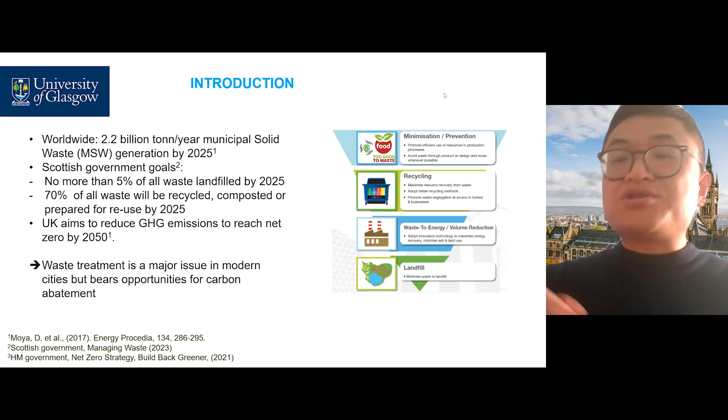So waste management is a major issue in modern cities and across the world, but at the same time it bears opportunities for carbon abatement. In the following slides, I'm going to show how it's possible and how we're trying to understand its carbon abatement potential.

The first case study we did is to understand different waste management schemes deployed in Glasgow. In Glasgow, we have about 30 million bin collections every year, and about 350 kilograms of household waste generated per annum per capita.

Our existing practice in Glasgow is that we have a very big recycling and renewable energy center. It's a centralized large system based on two technologies: anaerobic digestion and gasification. This helps to treat about 222,000 tons of waste every year. That is our existing technology.

These systems help handle, for example, food waste, garden waste, and other organic waste, as well as paper, cardboards, etc.

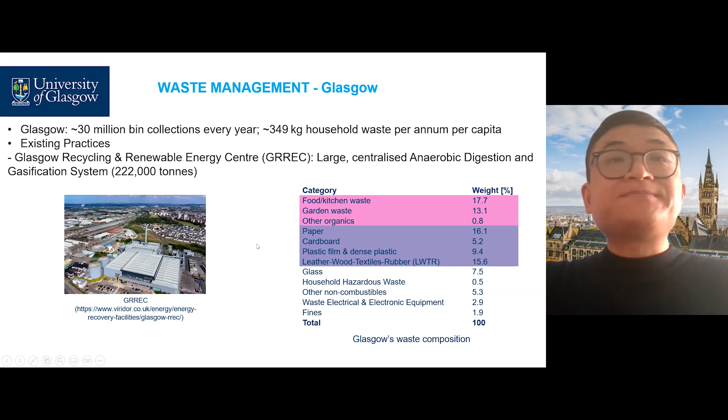So what are the environmental footprints of waste treatments at a smaller scale and in a more decentralized mode? This is the first question we are going to answer.

We again consider two relevant technologies: anaerobic digestion, which is devoted to treating organic waste, and gasification technology. For the analysis, we consider the anaerobic digestion technology as a two-stage mesophilic anaerobic digestion.

This is carried out in a continuously stirred tank reactor, which is also one of the most commonly deployed configurations for anaerobic digestion in the UK. We consider a digestate production rate of 500 kilograms per ton of waste treated, and the biogas yield is 350 cubic meters per ton of volatile solids, with a methane content of 60%.

For gasification technology, we consider a common technology deployed in the UK, which is a moving grate reactor. This is suitable for feedstocks with high moisture content, such as the organic fraction of municipal solid waste, and is also suitable for handling non-uniform morphology of municipal solid waste.

We consider air to be the gasifying agent. Solid residue is 15% for soil amendment. This is how we consider using the solid residue generated by the technology.

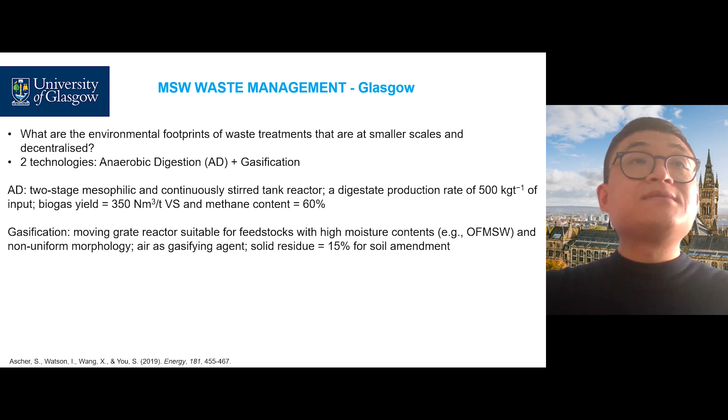So we can see the three scenarios, named 6A&G, which corresponds to 6 townships using both AD and gasification; 6G, corresponding to Glasgow divided into 6 townships, each with a gasification system deployed; and 3A&G, which corresponds to 3 townships using both anaerobic digestion and gasification in each township.

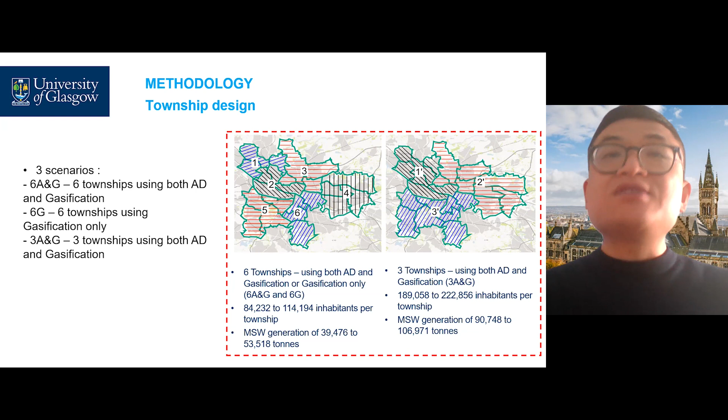Now I'm going to explain a little bit more about the life cycle assessment we carried out. First I'll cover some major points, and more detailed information can be found in the original publication. The functional unit we consider is treatment of 1 ton of municipal solid waste, and the division of different types of waste in that 1 ton is based on waste statistics for Glasgow.

In the system boundary, we consider electricity and heat generated to substitute electricity and heat generated from natural gas. Because we consider different configurations—3A&G, 6A&G—they correspond to different amounts of waste generation and different capacities required for the systems. So for larger plants, larger systems, we increased the process efficiency from 34 to 40% to account for the influence of system capacity on process efficiency.

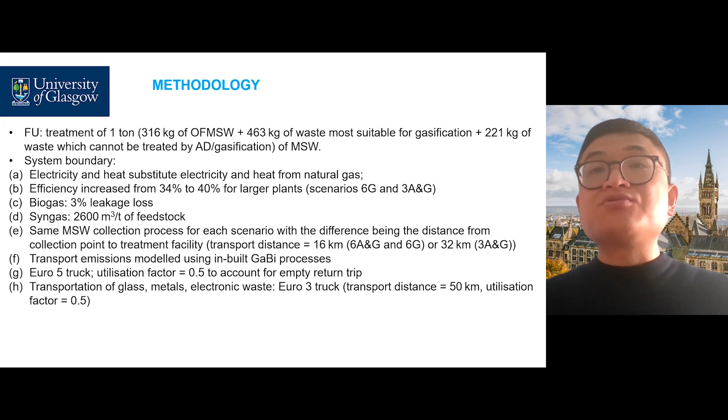This figure shows the system boundary we defined for this case, and the values in brackets indicate the gasification pathway. In the life cycle assessment, we consider three impact categories: global warming potential, acidification potential, and eutrophication potential.

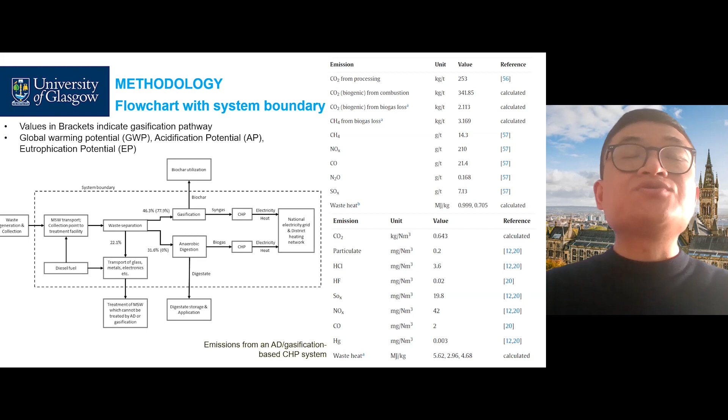Now let's look at the energy generation of the three different types of development. For the 6A&G development, the energy generated could satisfy the electricity demand of about 10,000 households, which is about 20% of local households in the communities served by the 6A&G scenario. The corresponding numbers for 6G and 3A&G are about 9,900 and 23,000 households, which are about 19% and 23% respectively. So this is for electricity generation.

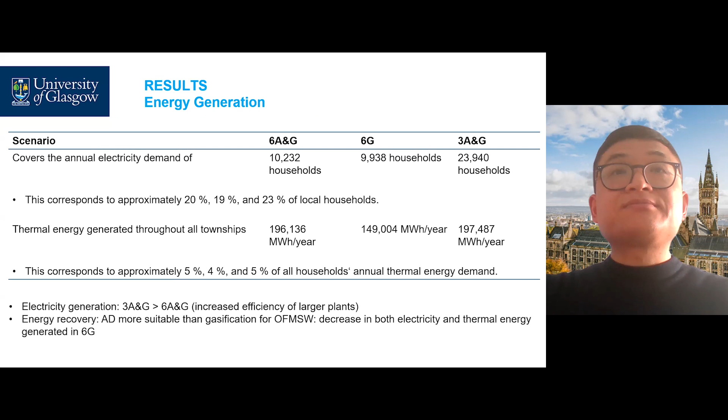For heat generation, we found that for the three scenarios considered, they could satisfy up to 5% of the energy demand of the households. Now let's look at the life cycle assessment results.

We found that for the three scenarios considered, they could generally avoid about 350 kilograms of carbon dioxide for each ton of waste treated. Also, the electricity displacement impact on the three impact categories analyzed is generally greater than the heat displacement. Transportation has a minor impact on global warming potential, but its impact on acidification and eutrophication potential is significantly higher.

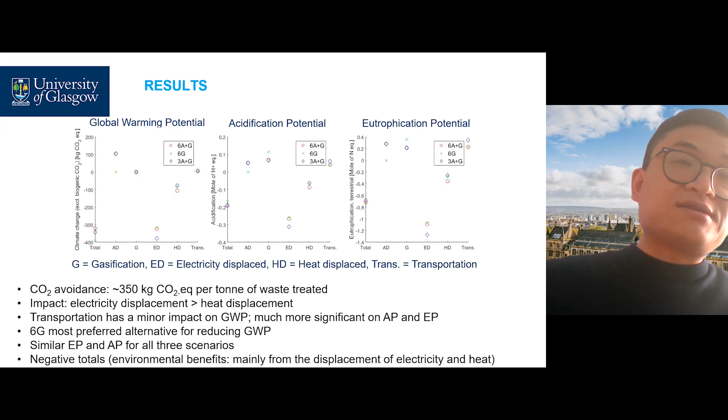The 6G scenario is considered to be the preferred alternative for reducing global warming potential, and these three scenarios achieve similar eutrophication potential and acidification potential.

Following that, we did a very simple sensitivity analysis, evaluating a few major parameters. The first one is the heat utilization rate. In the baseline scenario, we consider that all the heat generated could be utilized by the communities. But in reality, the energy generated might not be fully consumed by nearby communities, so we consider alternative cases with heat utilization rates of 50% and 0%, and explore how that impacts global warming potential.

We also changed the biogas leakage to 10%, considering a worse-case scenario for the anaerobic digestion system's biogas leakage. We found that a biogas leakage of 10% increased global warming potential from about 562 kilogram to 614 kilogram carbon dioxide equivalent, while the acidification and eutrophication potentials were not affected by this leakage.

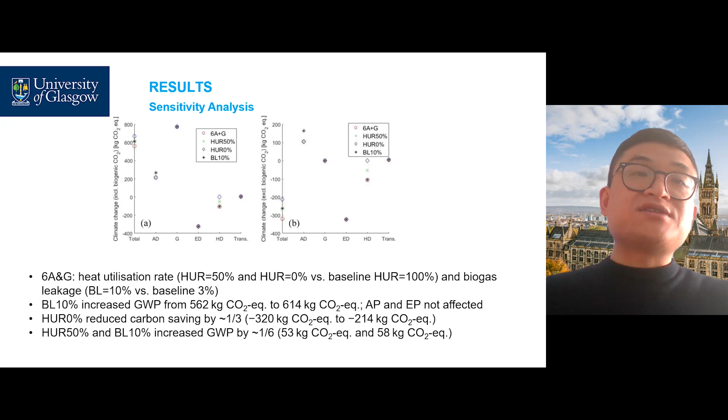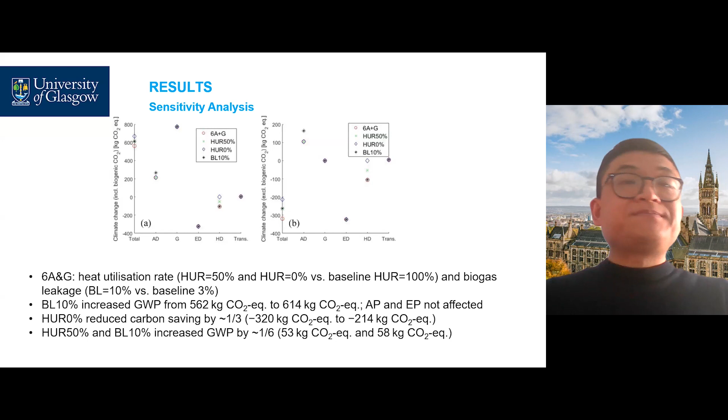For the heat utilization rate, when it's reduced to 0%, it could reduce the carbon saving of this kind of development by one third. So that is the first case for waste management in Glasgow.

The second case is more specifically on food waste management in Glasgow. In this case study, we explore the possibility of deploying anaerobic digestion systems in even smaller communities, and thus smaller systems, to see how feasible that is from an environmental perspective.

Food waste has always been considered a high priority waste stream, with significant social, economic, and environmental consequences. Prevention is key, but unfortunately not all food waste is avoidable. So here we divide Glasgow into 23 zones or townships, based on their 23 electoral districts, to explore the environmental footprint of small-scale system development in these areas.

We consider the food waste to be collected every fortnight by refuse collection trucks, with the biogas combusted in combined heat and power generation to produce heat and electricity, similar to what we explored in the first case. Electricity is fed into the grid, heat is used by local communities, and digestate is supplied to local farms to displace fertilizer.

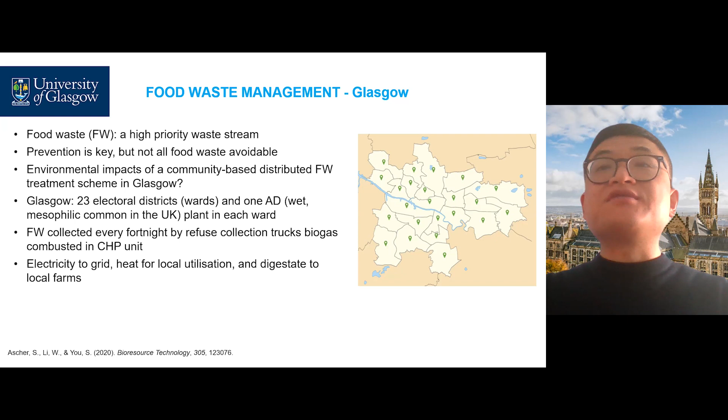For food waste production, it's about 17.7% of the roughly 480 kilogram of municipal solid waste generated per year in Glasgow. We multiply that data by the population of each individual ward to estimate food waste generation, which is then used to define the scale of the systems for energy production estimation.

One different thing from the first case is that we try to use a more sophisticated model to analyze the waste collection or transportation process. We reviewed existing models: the first is the Organic Waste Research model, developed by Swedish researchers. The second is the Waste Recycling and Cost model, requiring data on average road speed, set-out rate of bins, and truck capacity, developed by Australian researchers.

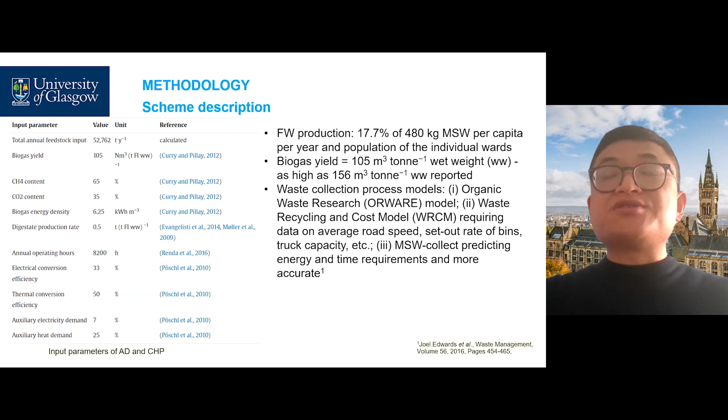Now I will talk a bit more about this collection transportation model. It basically divides the waste collection transportation into three stages. The first stage is the urban haul and return between the center of any collection area and the point where waste is unloaded.

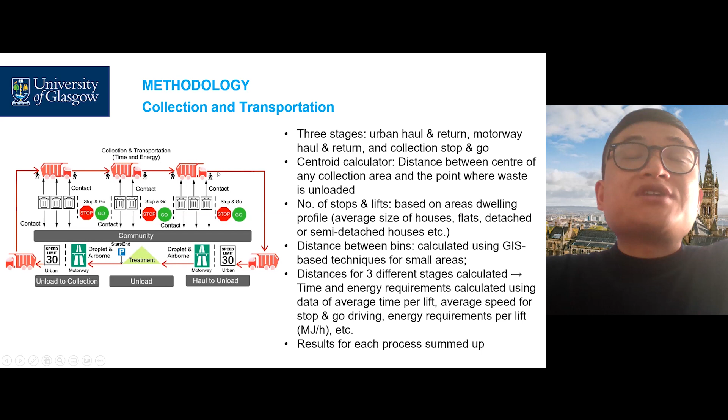By analyzing these three different stages and getting the time and energy requirement for each, we sum the time and energy requirement for each stage to estimate the overall time required for collection and transporting the waste, as well as the diesel required for collection and transporting the waste.

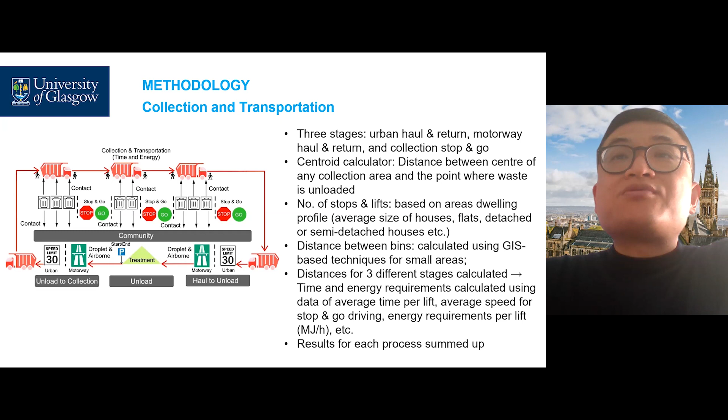Using this model, we estimate for our case that the diesel requirement is 2.95 liters per ton of waste collected, and the truck time required is about 0.83 hours per ton of waste treated. This leads us to determine the number of trucks required is 25.

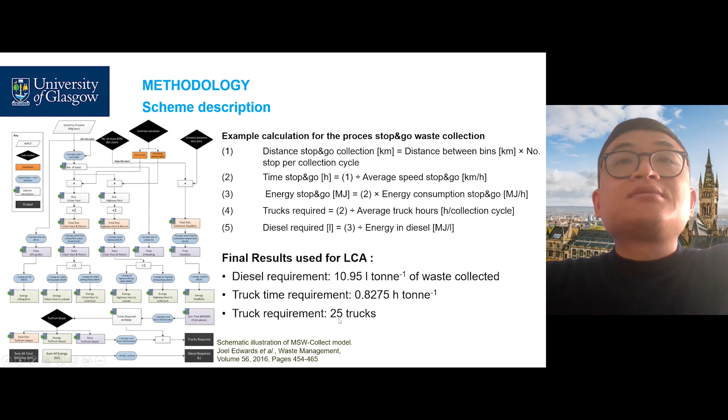Now I will talk a little bit more about the life cycle assessment carried out. It's basically about evaluating a community-based distributed food waste treatment scheme in Glasgow regarding 3 impact categories: global warming potential, terrestrial acidification potential, and particulate matter formation. The functional unit is treatment of 1 ton of food waste.

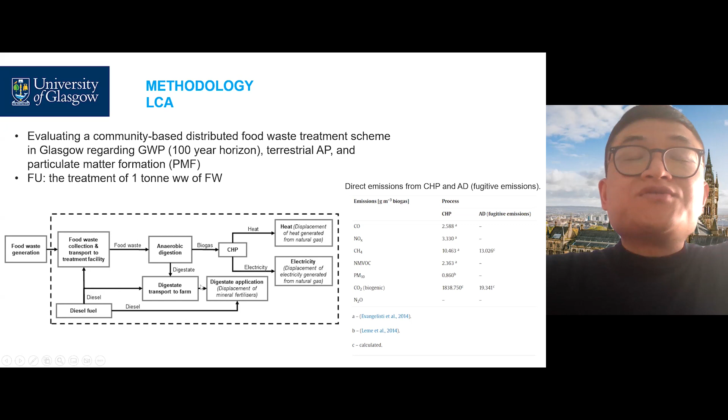The figure here shows the system boundary. It includes food waste collection transportation, anaerobic digestion to generate biogas, and also biogas utilization and combustion in combined heat and power generation to generate heat and electricity, with the heat and electricity used to displace heat and electricity generated from natural gas. For the digestate from anaerobic digestion, we consider it being transported to a nearby farm and used to displace chemical fertilizer.

The biogas leakage, similar to the previous case, for the baseline scenario is 3%. The emissions due to waste collection are estimated using 2 built-in GaBi processes. The first is diesel mix at refinery, which we use to estimate emissions related to diesel production. The second is the dump truck payload built-in process that helps us estimate the emissions related to combustion of diesel in the truck.

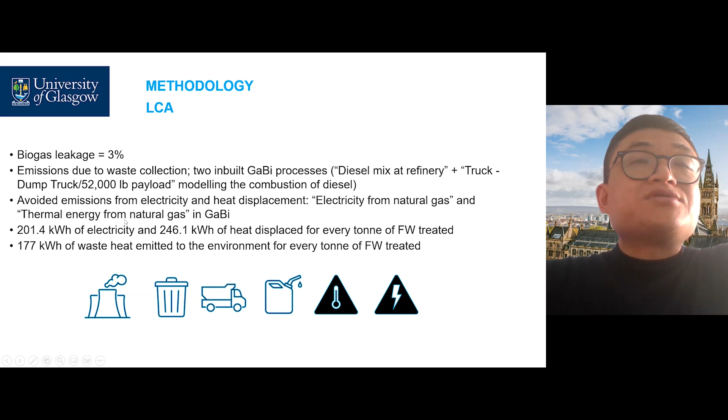For the avoided emissions from electricity and heat displacement, we consider electricity from natural gas, this built-in process in GaBi, and also the thermal energy from natural gas.

Here we particularly analyze the avoided emissions related to digestate application. We consider the digestate being transported and spread on a typical farm in Glasgow, with a transport distance of 20 kilometers, using a 16-ton truck. For spreading digestate on farm, we consider a tractor used, and for on-farm transportation, the average distance is 2 kilometers.

So we use that transportation collection model to estimate the collection transportation of the waste and the associated emissions. To further account for this, we add the emissions from transportation and spreading into the system to account for emissions related to transportation and spreading of digestate.

For the avoided emissions by digestate as a fertilizer, there are 3 factors we've considered. The first factor is that in order to estimate the avoided emissions by digestate, we first estimate the carbon, nitrogen, phosphorus, potassium in digestate based on British food waste composition.

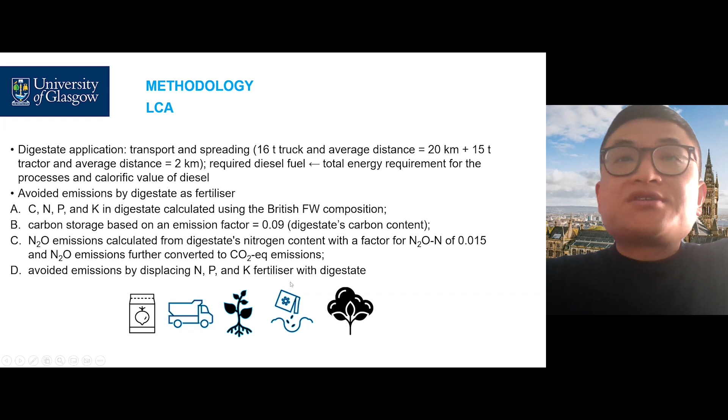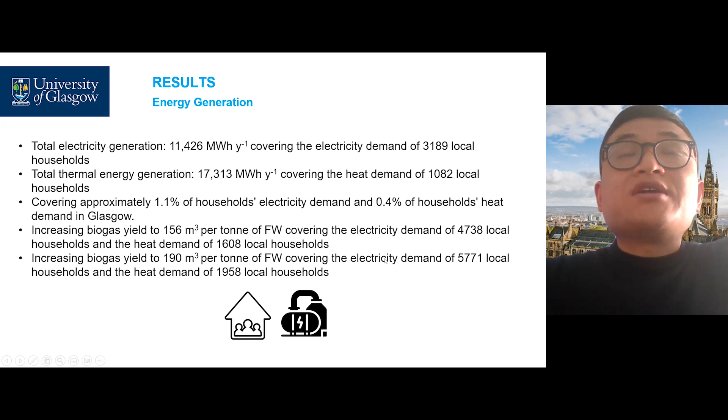For the results, first let's look at energy generation. For this smaller scale anaerobic digestion system for communities, each community could cover, for electricity, about 3,200 local households. For heat, it's about 1,080 local households. This is based on a biogas yield of 105 cubic meters per ton of waste treated. Of course, when the biogas yield is even higher, as reported in the literature, more households will be able to be covered by this kind of development.

For the life cycle assessment results, we find for global warming potential, excluding biogenic carbon, this kind of small scale development could save about 92 kilograms of carbon dioxide equivalent. Similar to the first case study, we find that displacing electricity has a higher impact on global warming potential than displacing heat, which is further higher than displacing digestate. For the major greenhouse gas emitters in this case study, the biogas leakage impact is greater than waste collection transportation, which is further greater than combined heat and power generation combustion.

If we consider biogenic carbon dioxide, it could substantially change the global warming potential. For example, the combined heat and power generation emissions will increase from 31 to about 224 kilograms carbon dioxide, and the digestate related emissions will increase from about 58 kilograms carbon dioxide equivalent to 225 kilograms carbon dioxide equivalent.

For acidification and particulate matter formation, they are mainly dominated by the combined heat and power generation. Combined heat and power generation contributes significantly to all three impact categories in terms of carbon saving. This suggests that post-combustion carbon capture and storage is important for further reducing the global warming potential of this kind of development.

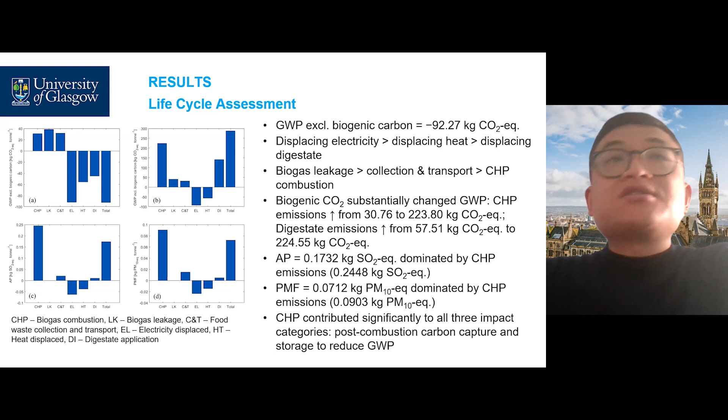So this is the first two case studies. For the third case study, we further expand the consideration of food waste and incorporate the management of cow slurry, because cow slurry is receiving attention by industry. For example, two years ago, news reported that cow slurry is kind of harmful to cows in the farms itself, and at the same time, companies and industries are trying to figure out how to better utilize the cow slurries or manures generated in the farms. The companies try to convert it into fuel used for transportation, and recently they considered generating biomethane to displace natural gas utilization in the grid.

So what we're going to consider is not only handling cow slurry, but handling both food waste and cow slurry. We're going to convert these two organic wastes into biomethane to displace natural gas use, using the anaerobic co-digestion technology, and the digestate is considered to be a biofertilizer still. The objective of this case study is to understand the environmental footprint of that kind of development in Glasgow.

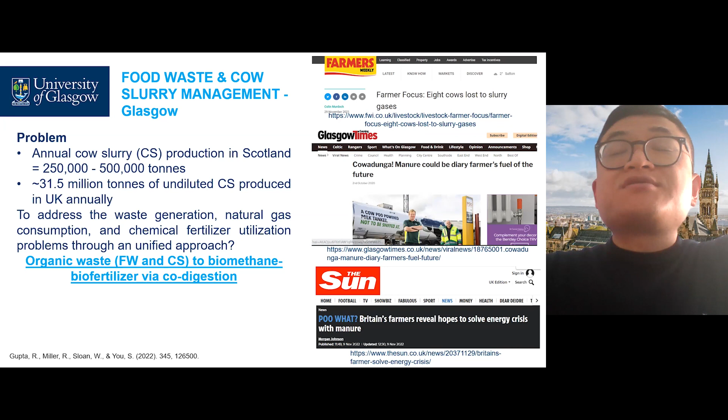In order to generate the biomethane, we need to upgrade biogas, so we need to compare different technologies available. We consider 4 technologies. The first is pressurized water scrubbing, which is based on the solubility difference of different gases to upgrade it. The second is chemical scrubbing, which uses solvents for separating the gases. The third is membrane separation, and the fourth is pressure swing adsorption.

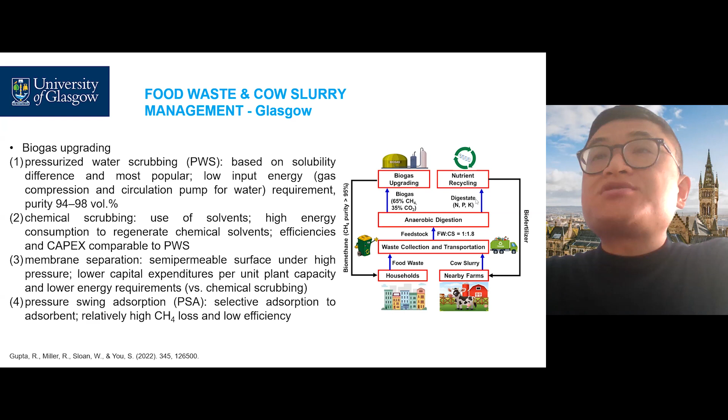This figure illustrates the overall idea of this development. We have the food waste from local households and cow slurry from nearby farms, and we generate biogas, which gets upgraded to generate biomethane, and the digestate being supplied back to the farms as fertilizer.

For the anaerobic digestion technology, we consider a wet mesophilic technology, and the mixture ratio between food waste and cow slurry is 1 to 1.8, and the methane content in the biogas is 65%, as considered before. The food waste considered is coming from 23 wards, while the cow slurry is from the farms of South Lanarkshire, which is a major council in the south of Glasgow.

Again, we still used the MSW Connect model to estimate the time and energy required for this kind of development.

For more details of the life cycle assessment: first of all, the objective or goal of this study is to compare the global warming potential of biomethane production based on food waste and cow slurry co-digestion. We specifically compare different biogas upgrading technologies. The functional unit is the treatment of 1 ton of organic waste, consisting of 360 kilogram food waste and 640 kilogram cow slurry. The scope of the study, the system boundary we consider, includes the processes from the point of waste collection to the injection of biomethane into the grid.

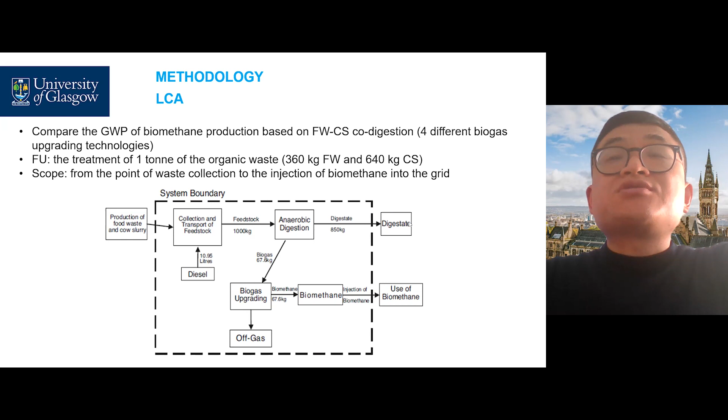Now I'm going to explain a bit more about the major points of life cycle assessment, particularly the life cycle inventory analysis. We consider the avoided emissions of this new development as compared to existing waste treatment, which includes avoiding this kind of waste being treated by landfill and incineration, as well as avoiding the emission related to slurry storage in the farms.

For the collection transportation, we used a similar inbuilt process model in GaBi to estimate the production and combustion of diesel in the processes. For the AD plant operation, we consider it requires 0.13 kilowatt-hour per ton of waste treated, and this is combined with the inbuilt process EU 28 electricity grid mix to estimate the emissions related to AD plant operation.

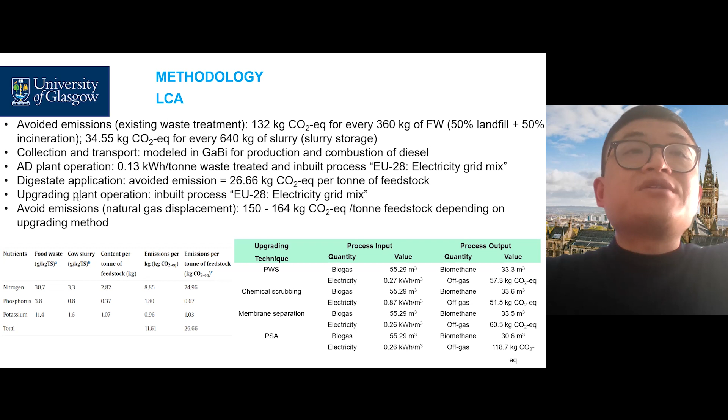For the digestate application, we consider the avoided emission to be 26.66 kilogram carbon dioxide per ton of feedstock treated. For the upgrading plant operation, we consider the energy consumption required by different technologies, as shown in this table, and then combine this electricity consumption with the inbuilt process in GaBi, which is EU 28 electricity grid mix, to estimate the emissions related to upgrading plant operation.

So for the results, let's first look at the efficiency and energy production. We found that chemical scrubbing generates the most energy, and thus could be used to power most households in this kind of development. The membrane separation technology has the highest efficiency, which is 83%, and could be used to power about 2,252 households, while the PSA technology has the lowest efficiency, at about 60%.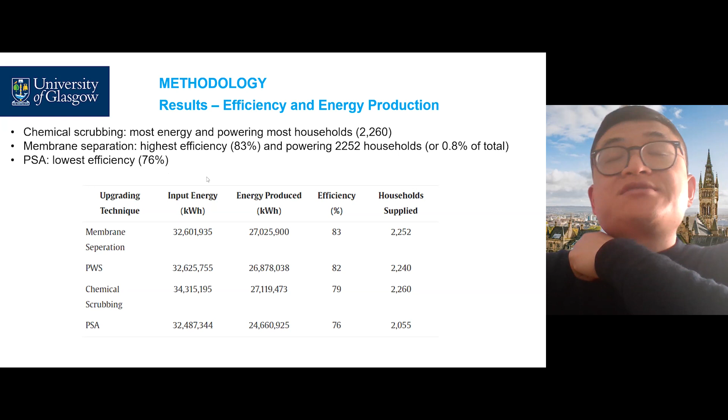For the life cycle assessment result, we found the anaerobic digestion development could reduce global warming potential by up to 264 kilogram carbon dioxide equivalent per tonne of waste treated. And for the waste collection transportation, it accounts for about 7 kilogram carbon dioxide equivalent per tonne of waste treated.

And for the plant operation, it contributed about 6 to 15 kilogram carbon dioxide equivalent per tonne of waste treated. This is about upgrade plant operation. So this number varies depending on the technologies utilized.

The biogas leakage is still a very significant contribution to the global warming potential, which accounts for 22 kilogram carbon dioxide equivalent per tonne of waste treated. The digestate application could help save about 27 kilogram carbon dioxide equivalent per tonne of waste treated.

The largest carbon saving comes from the natural gas displacement, which is the major benefit of this kind of biomethane development. Compared to the different biogas upgrading technologies, we found PSA is less favorable due to its high off-gas emissions and thus relatively higher carbon footprint.

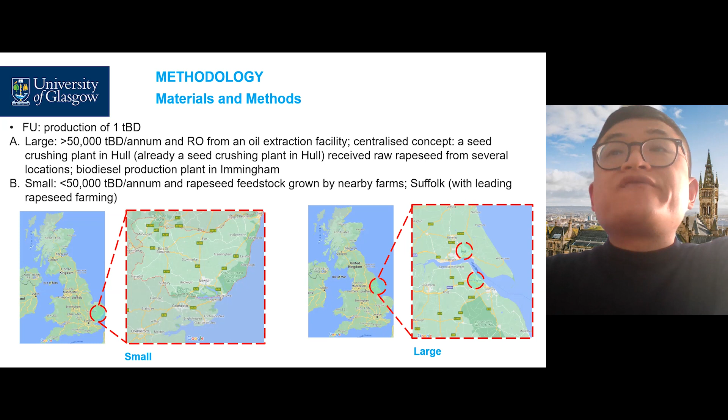For small-scale development, we consider a scale smaller than 50,000 tons biodiesel per annum, with the rapeseed feedstock grown by nearby farms. This plant is located in Suffolk, which is considered to have a leading rapeseed farming system.

For the system boundary, we consider, as just mentioned, the 4 major stages involved for biodiesel development. I will then explain them one by one.

The first one is rapeseed agriculture. We consider cultivating rapeseed by following the guidelines by New Holland Agriculture, which is adapted to the UK context based on the Farm Management Handbook.

For the large-scale development, rapeseed agricultural cultivation starts with subsoiling, which happens every 4 years, and then the soil is plowed with minimum tillage. Following that, seed is sowed and rolled onto the ground, then fertilized twice, with pesticides applied 6 times for each farming cycle. Then the rapeseed is harvested using a combined harvester.

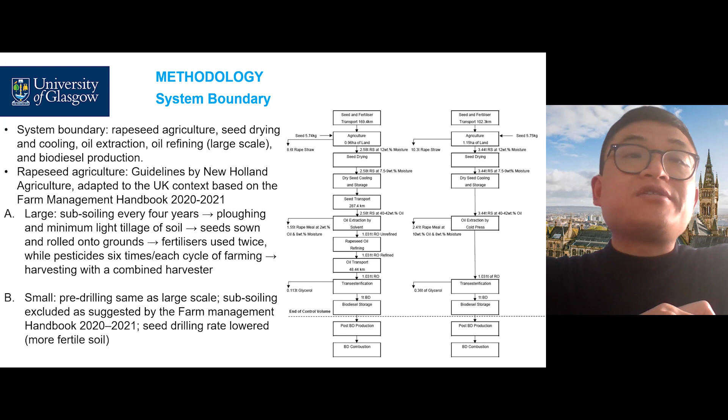For the small-scale development, rapeseed agriculture is kind of similar, but for example, the pre-drilling is the same as the large scale, while subsoiling is excluded as suggested by the Farm Management Handbook. The seed drilling rate is lowered because Suffolk is considered to have relatively higher fertile soil.

For the seed drying and cooling, we consider a grain dryer, which is run via a power takeoff shaft connected to a tractor, and it's cooled with 2 fans for 12 hours per day.

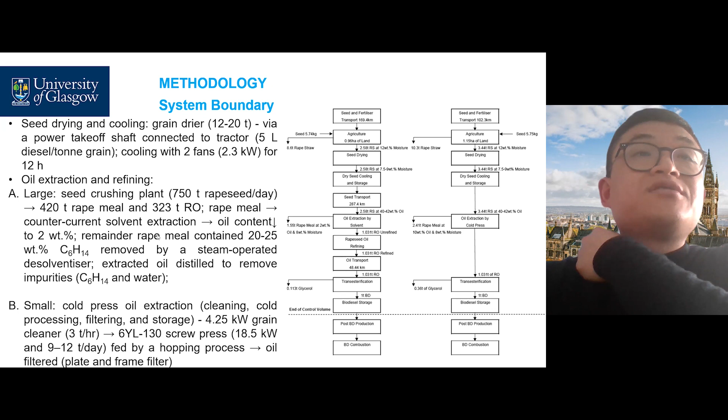For the oil extraction and refining, for the large system, we consider a seed crushing plant which can handle 750 tons of rapeseed every day. This generates 420 tons of rape meal and 323 tons of rapeseed oil. The rape meal is further utilized in counter-current solvent extraction, which is used to further reduce the oil content in the rape meal.

And then the remaining rape meal being treated in a steam-operated desolventiser, which is used to remove the hexane. The extracted oil is being distilled to remove impurities, including hexane and water.

For the small-scale development, we consider a cold press oil extraction technology, which includes cleaning, cold processing, filtering, and storage four sub-processes. The cleaning is done using a grain cleaner, and a screw press is used for the cold processing of the rapeseed, which is fed by a hopping process. In the end, the oil is filtered using a plate and frame filter.

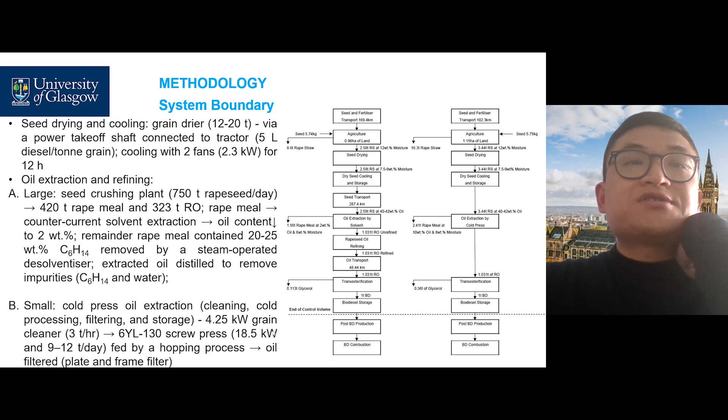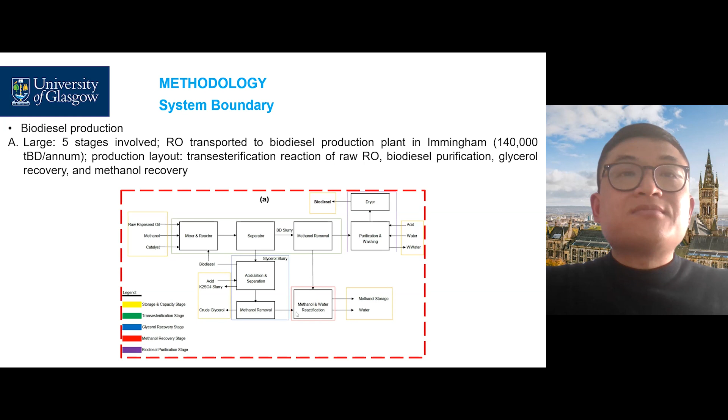For the biodiesel production, for large-scale development, we consider 5 stages: storage and capacity, transesterification, glycerol recovery, methanol recovery, and the last one is biodiesel purification.

For the small-scale development, similar 5 stages are involved, but it uses a 100-liter semi-continuous batch biodiesel reactor.

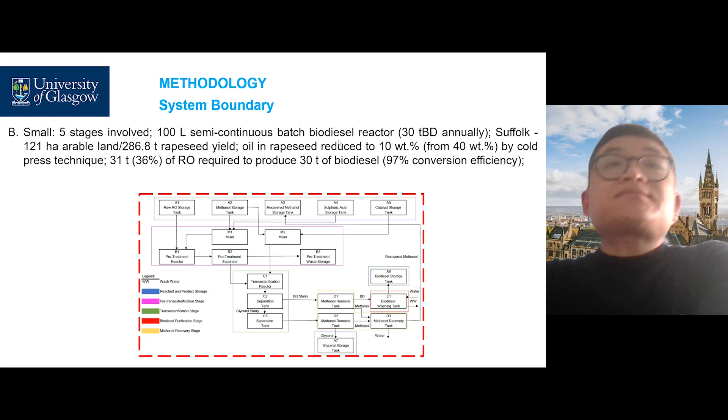For the transportation, we consider different distances for the large scale and small scale development. The large scale transport distance is 505 kilometers, and the small scale is about 102 kilometers.

The fertilizer utilized in the cultivation of rapeseed includes urea, triple superphosphate, muriate of potash, and ammonium sulfate. These are the common fertilizers utilized in agriculture activities in the UK. After estimating the amount of fertilizer utilized, we multiply it with their corresponding global warming potential conversion factors to estimate the emissions related to the use of these fertilizers.

In the life cycle assessment, we consider two impact categories: one is the global warming potential, and another is the cumulative energy demand. In the end, we carry out a sensitivity analysis to understand the influences of changes in the process designs on the environmental footprint of the development.

So now let's look at the results of the life cycle assessment. We find, first of all, rapeseed agriculture and biodiesel production are the two highest consumers of energy. For the large scale system, it consumes 72% of energy, while for the small scale, it consumes 92% of energy.

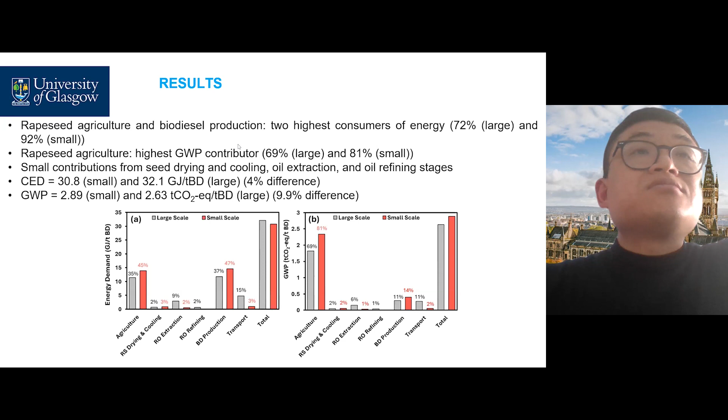Okay, so let's look at the emission breakdowns. The first one we explore is the agriculture stage, because it's the major contribution to the energy and global warming potential. For the agriculture activities, we find fertilizer is the major contribution to this stage, followed by diesel usage. This applies for both the large scale and small scale development.

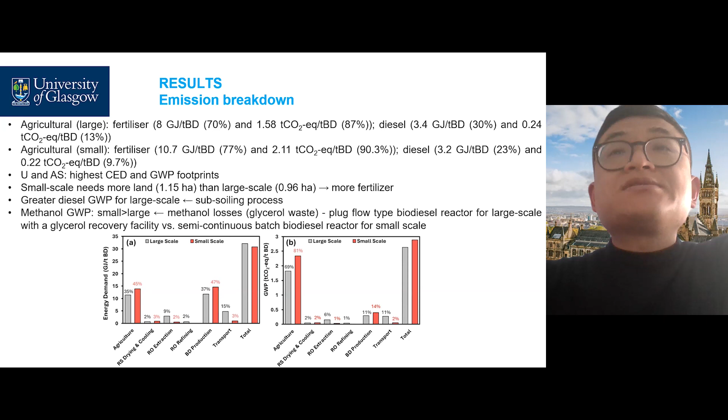For the fertilizer utilized, urea and ammonium sulfate have the highest cumulative energy demand and global warming potential footprint. We find the small scale has more carbon footprint in relation to the use of fertilizer. This is because the small scale development needs more land than large scale development, and thus more fertilizer.

And for the subsoiling process, the larger scale development will have higher diesel consumption related global warming potential as compared to the small scale development.

For the methanol related global warming potential, the small scale is greater than the large scale. This is because the methanol generated in a small scale development is not considered to be recycled, while for the large scale development it's considered to be recycled because of the technical feasibility considered.

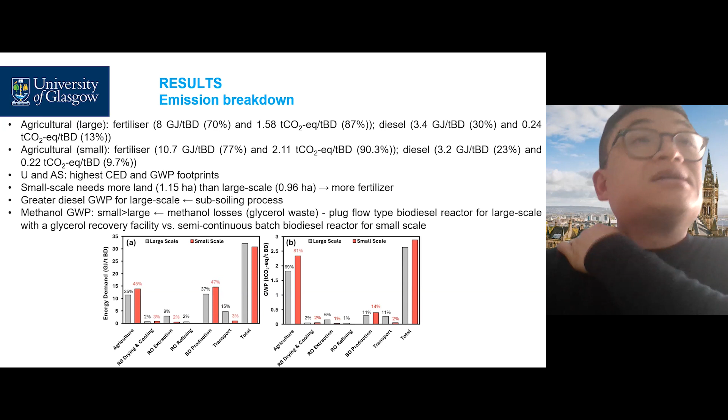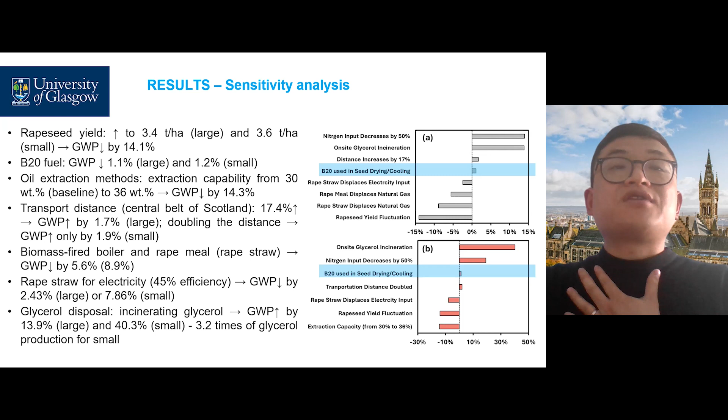by 13.9% for large-scale development and 40.3% for small-scale development. The greater increase for small-scale development is because about 3.2 times more glycerol is produced for small-scale development as compared to large-scale development.

So after the sensitivity analysis, we try to explore alternative configurations and see how that's going to help us deliver a better option for biodiesel production in the UK. So we consider a few different methods.

The first one is to switch to low nitrogen nutrient methods for rapeseed cultivation. The second one is to use B20 to displace fossil fuel in rapeseed farming and seed drying and cooling. The third one is replacing the natural gas-based heating by utilizing rape straw.

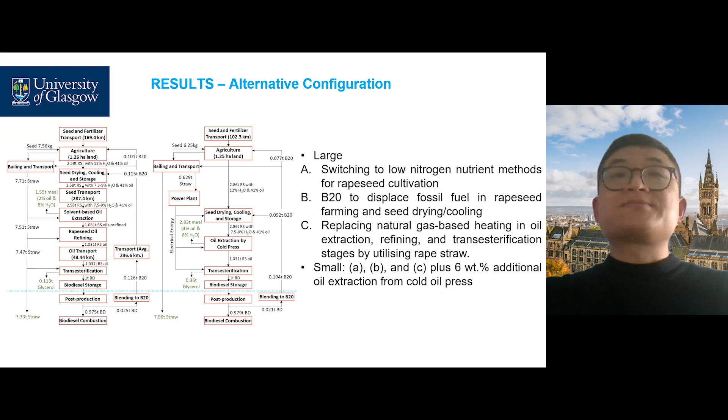So this is for large-scale development, the changes we made to improve the global warming potential of the development. For small-scale development, we still consider these three changes, plus 6% additional oil extraction from the cold oil press. And this helps us significantly improve the carbon footprint of the development.

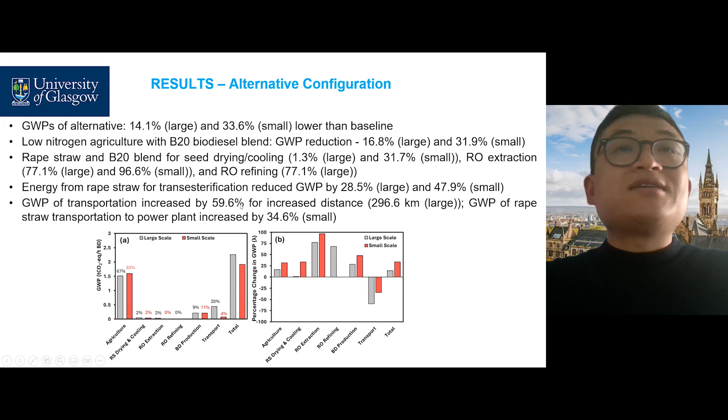So it could help reduce, for the larger scale development, 14.1% of global warming potential, and for the small scale development, 33.6% of global warming potential. So for the other details, I will skip here for now because of time constraints.

So that is the first part of the talk, which is about clarifying some kind of case study we carried out for understanding bioenergy waste management in Glasgow in the UK. The second bit is about the application of machine learning-based methods.

One very important reason why we carry out machine learning-based methods is that when we try to do the life cycle assessment, we face difficulties getting quality input data, specifically for example for the processes we considered in this development. And also we find this limits our flexibility in design or optimizing this kind of development.

Therefore, we try to use this kind of machine learning based method to help us develop models that could be used to quantify the changes and the influences of changes in process conditions on the productivity of this kind of waste management and bioenergy production technologies.

And we can see in the literature the application of machine learning is increasing over the years, and it's echoed with increasing accumulation of quality data for the different technologies that could be considered for advanced waste management or bioenergy generation.

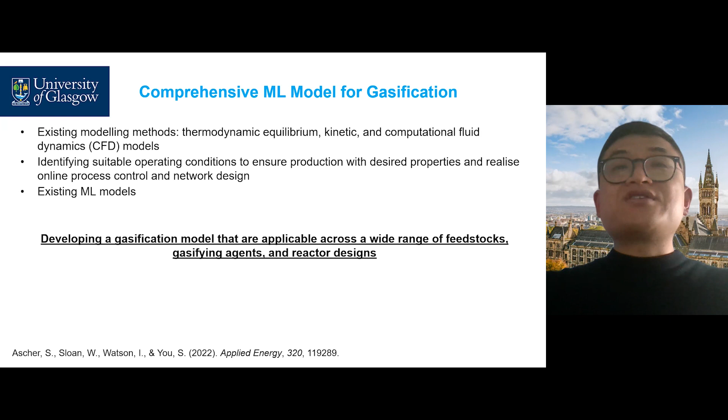So we try to mitigate the weakness of those existing models. We try to develop a more comprehensive machine learning model for predicting the production of gasification technology. To achieve this, we gathered a database which covers a wide range of feedstock types, different gasifying agents, and different reactor designs.

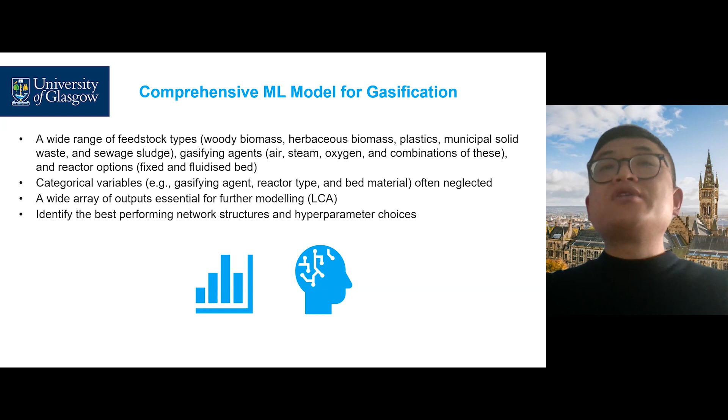We also considered categorical variables in the machine learning models, which has often been neglected. And we found these kinds of variations in the model inputs and outputs will be helpful for us to carry out a more efficient life cycle assessment.

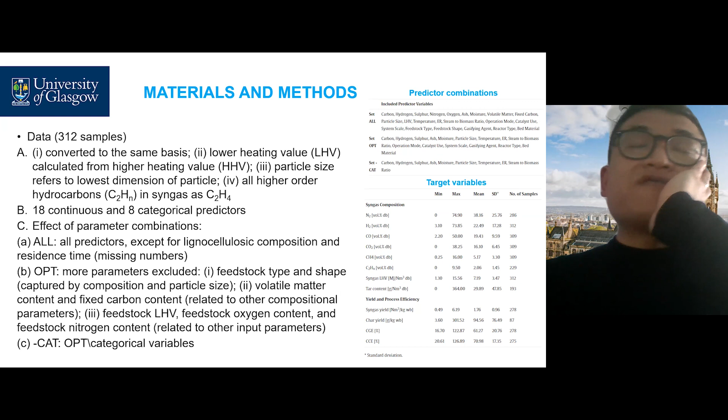What we do is basically develop machine learning based models, and for gasification this has higher generalizability, so it could be applied for different feedstock, different process conditions, reactor types, use of catalysts, and we consider the influences of those categorical variables on the production of the gasification process.

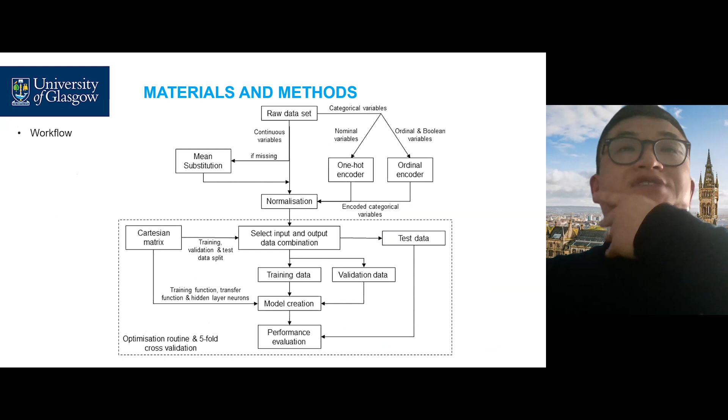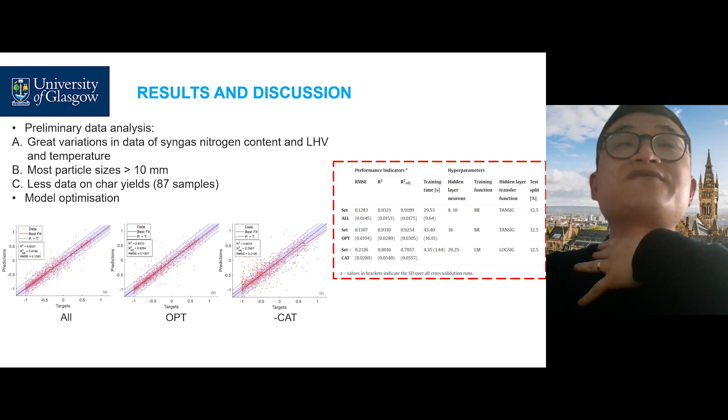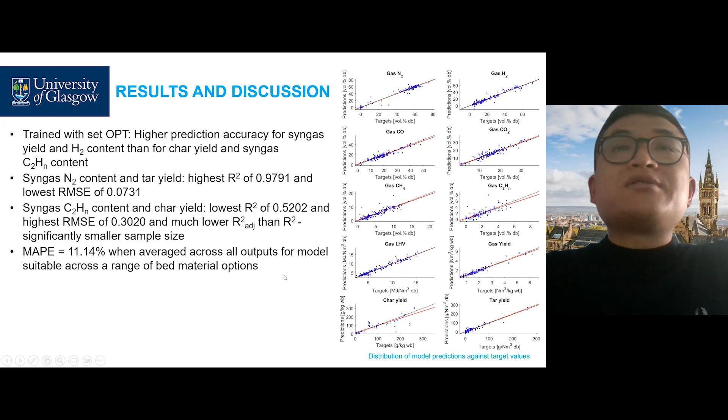In general, the models we developed could achieve a reasonably high accuracy in predicting gasification production, but there are two products that this kind of model performs particularly worse on: char yield and hydrocarbon generation. This is because for these two types of generations, the data available in the literature is relatively scarce, which limits the performance of the machine learning models developed.

We also developed models to interpret the machine learning models, and to understand how those models actually make predictions for the gasification technology.

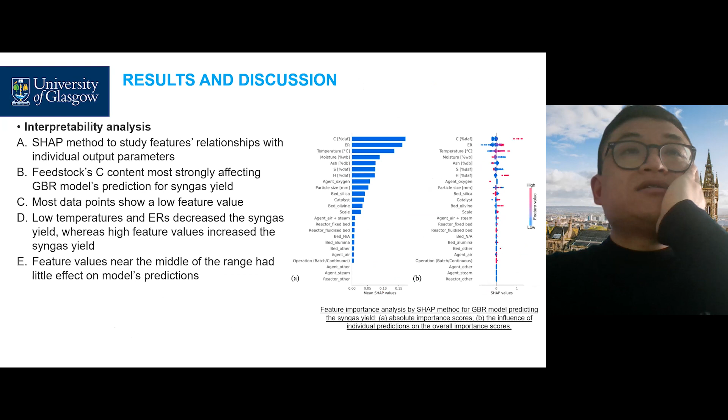Following that, we changed the technology to consider pyrolysis, which is a very important technology that could be used to generate biochar for soil application. We recognize that biochar yield and composition are both very important factors for us to estimate its impact on soil and its impact on global warming potential.

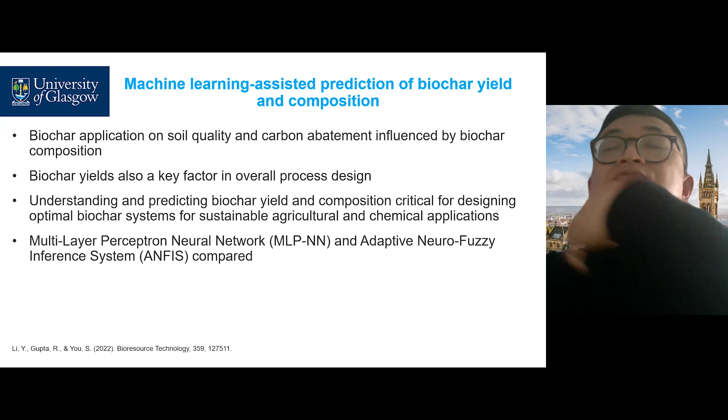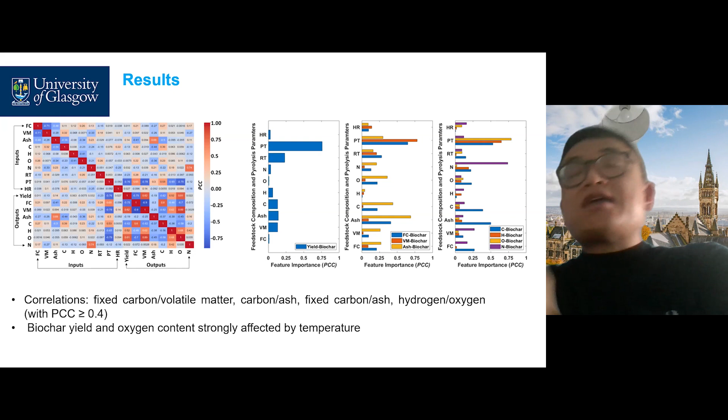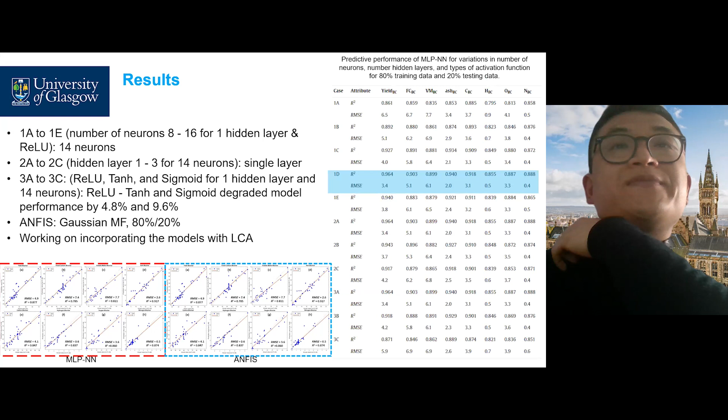We developed two models, one based on neural networks, another based on ANFIS, to predict the biochar yield and composition. This model will then be combined with life cycle assessment to understand how biochar application could be optimized or improved for soil application.

The last bit is about integrating anaerobic digestion with a heat pump. We utilize a machine learning-based method to model the anaerobic digestion process, which helps us define the optimum temperature required for the process. That temperature then helps us define the capacity and process for the heat pump used in this integrated development.

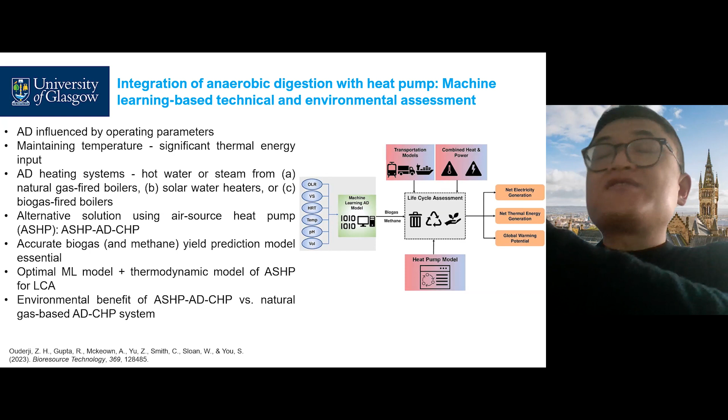We then apply this integrated model in the life cycle assessment to evaluate and quantify the carbon saving potential of this integrated system as compared to existing natural gas-based anaerobic digestion systems. It shows that up to about 30% of the carbon dioxide could be saved with this new configuration.

So I think that's it for my talk today. I'm sorry the time wasn't managed that well. I hope you found this talk useful, and I wonder if there are any questions.